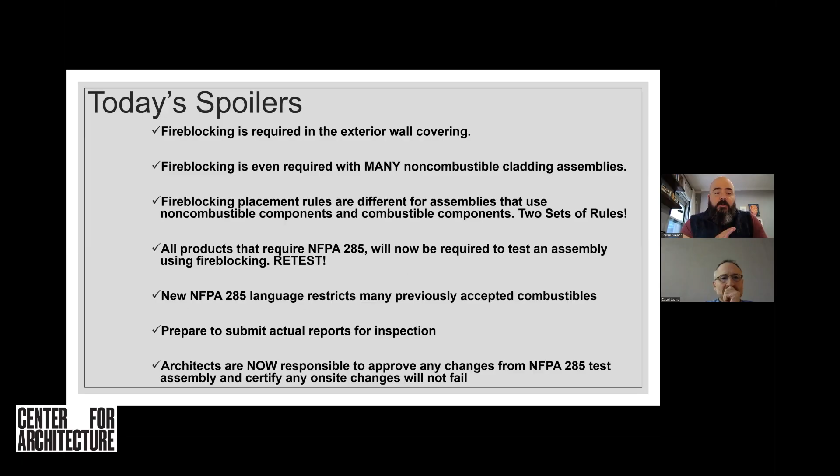To start with, I like to provide these spoilers, mostly so that we can hit on some important points and remember them, but also if you want to fall asleep after this because you're not interested in getting into the details, you have everything you need on this first slide. So let's go through these real quick. Fire blocking is required in the exterior wall covering, and we'll talk about the exterior wall covering in a second. Fire blocking is even required with many non-combustible cladding assemblies, and that's something that's misunderstood. We'll get into the language there.

Fire blocking placement rules are different for assemblies that use non-combustible components versus assemblies that use combustible components. There's two sets of rules, and we'll break those down. All products that require NFPA 285 will now be required to test an assembly using fire blocking, and new NFPA 285 language restricts many of the previously accepted combustibles. We will review that language at the end of the presentation.

And then, manufacturers and architects should prepare to submit actual reports for inspection. And what I think is one of the most major changes from an ideological standpoint is architects are now responsible to approve any changes from the NFPA 285 test assembly and certify that any on-site changes will not fail. Right? That's something at the end of this presentation that might draw a few questions.

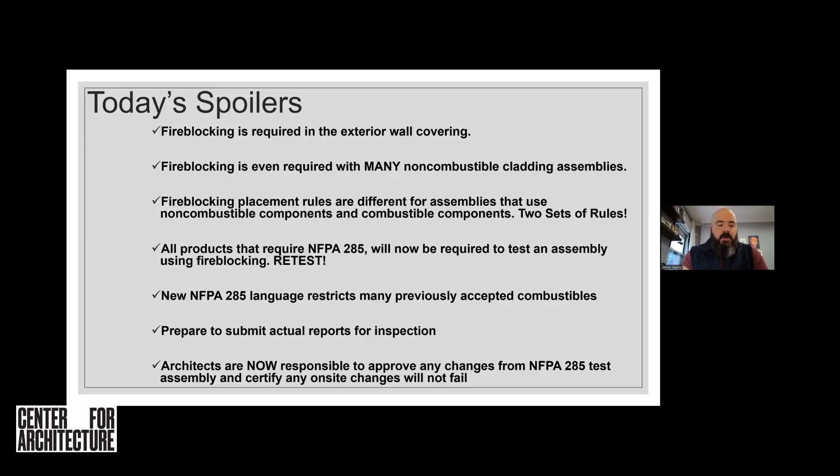So there you go. If you're not interested in the details, you have all the important points. Now let's start with the ground rules that I always like to review before we get into any code language, because for folks that aren't in code language every day, like myself, I think it's often misunderstood how code is actually both written and enforced.

Rule number one for me is that code logic doesn't exist. You have to suspend your typical logic streams and realize that the code language is what it is. Rule number two is that this should be a no judgment zone. I spent the first couple of years dealing with this language, getting frustrated.

And what we should all recognize is that new building codes, especially ones that change this much and try to advance this much, are always going to have conflicts and gaps and areas of confusion. We hopefully will be able to have some clarification and adjustments going forward, but it's something that we have to live with in order for code changes to occur.

And then rule number three, building code language does not equal project compliance. And project compliance is a mixture of both the AHJ enforcement in individual jurisdictions and code language. So even though we're going to be reviewing a lot of code language today, what the code language actually says is also mixed with who's enforcing it and project specific requirements.

And that really gets into our disclaimer here, is that we're going to be talking about certain code language. I'm going to be voicing certain interpretations of that code language, but how it applies to your specific project is going to differ, right? And that's going to be because of a lot of reasons, not just because of your project and the AHJ enforcement. From that perspective, any use of this sort of information on a specific project should be done by a professional.

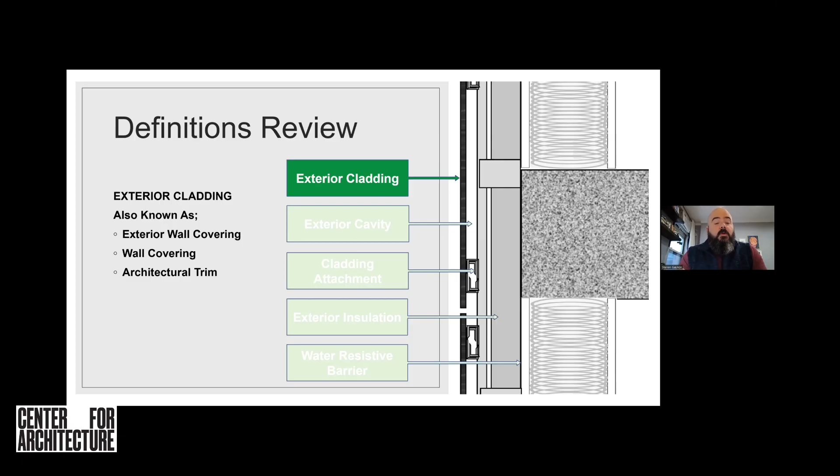So when we're talking about exterior cladding, you see the dark green on your screen here. That's the outermost layer. It's also known as exterior wall covering, or architectural trim in the code language. So remember that. Exterior cavity might be known as the cavity, the airspace, the concealed space, or just the space. When we talk about the exterior cavity, we're talking about the cavity behind the exterior cladding and in front of whatever the next layer is. Maybe that's exterior insulation, what have you.

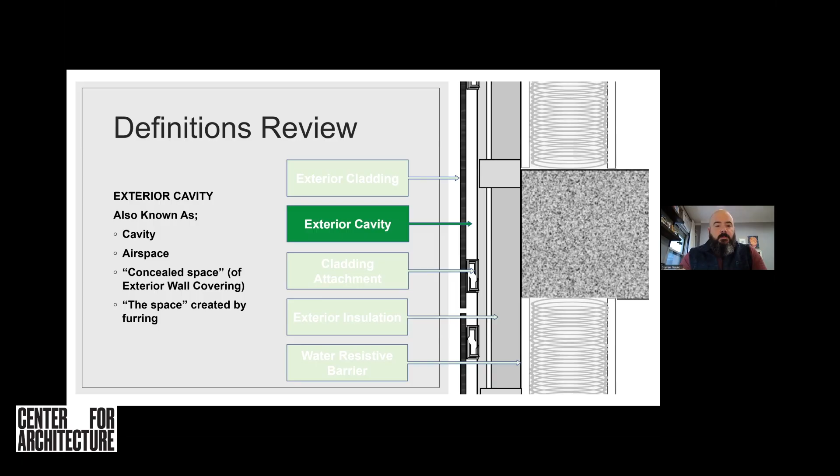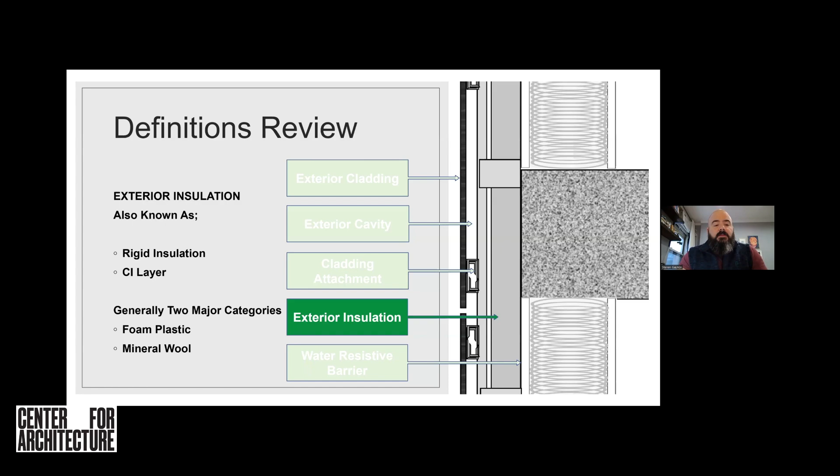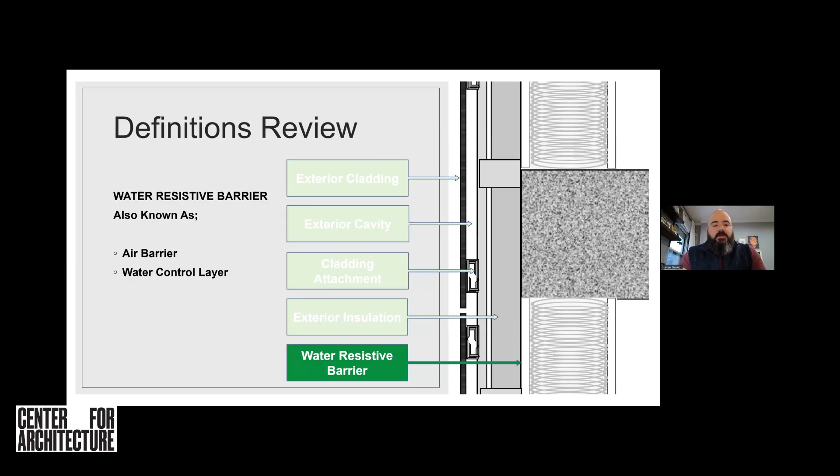Cladding attachment is also known as substructure, attachment system, framing, components, or framing system. And exterior insulation, in the code language, we might see continuous insulation, but we often talk about exterior insulation referring to rigid insulation or the CI layer. And then finally, the water resistive barrier. In the code, that's pretty consistent, but this barrier might also be interchanged with the air barrier or the water control layer. Together, this whole assembly is known as an exterior assembly, a facade system, or exterior wall covering.

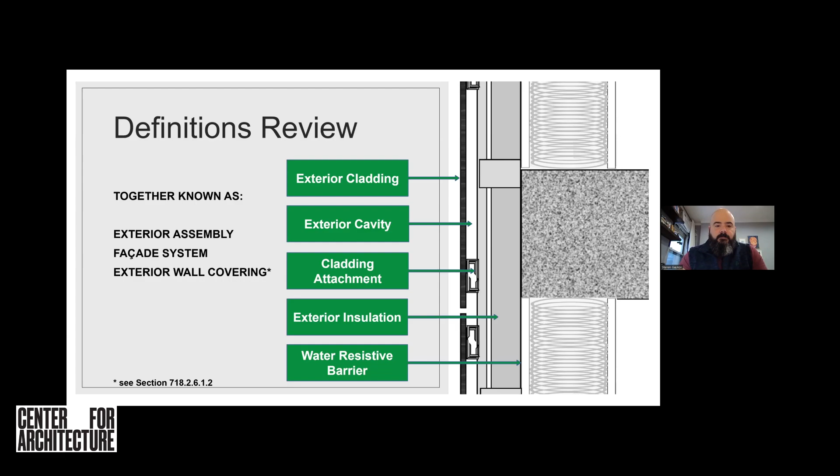And that's another important point. Exterior wall covering in the code might be referring to just the exterior cladding or the entire assembly. Another quick point of review is NFPA 285. If you are not familiar with NFPA 285, then you should probably take a primer course before getting into the language we're going to talk about today. But I just want to talk about a couple of things.

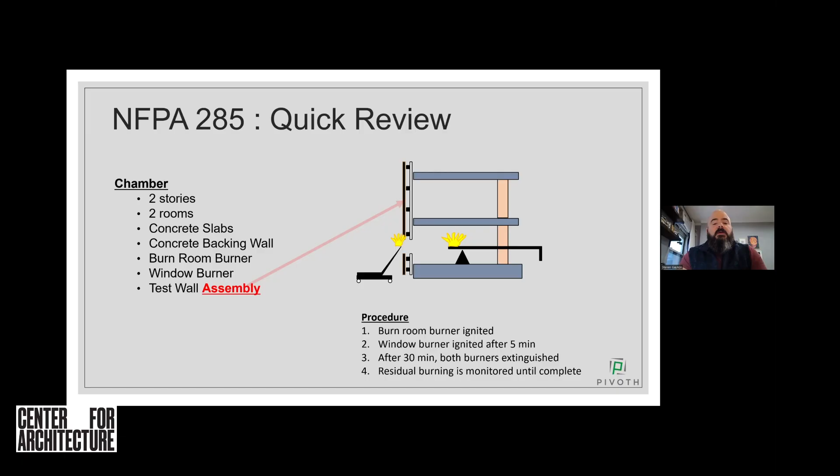On the right-hand side of your screen, you see a section view of the NFPA 285 test. This is a test that determines flame propagation and heat propagation up a wall system. What we want to do by implementing this test is make sure that the exterior wall covering does not propagate flame or heat in a way that spreads it up the building or to separate units.

The test parameters for that are fairly simple, and the important ones, I think, for our discussion are 10 feet above the window opening where the fire is occurring, and 5 feet from either side of that window opening. During the test, you cannot exceed 1,000 degrees in those locations, and the flame can't be attached in those locations, essentially meaning the flame is limited and the heat is limited.

Now, what's important about that is this test traditionally has been used for any sort of combustible materials, right? And that's because the fire doesn't care what it burns. I was taught that very early in my career, and as far as enforcement goes, rule number 3, we've seen that AHJs have usually accepted NFPA 285 tests for materials that aren't mentioned in the code because it's all about the performance, right? That flame spread and the heat development.

And traditionally, this test is for materials that are categorized as combustible per ASTM E136 or that section in the code.

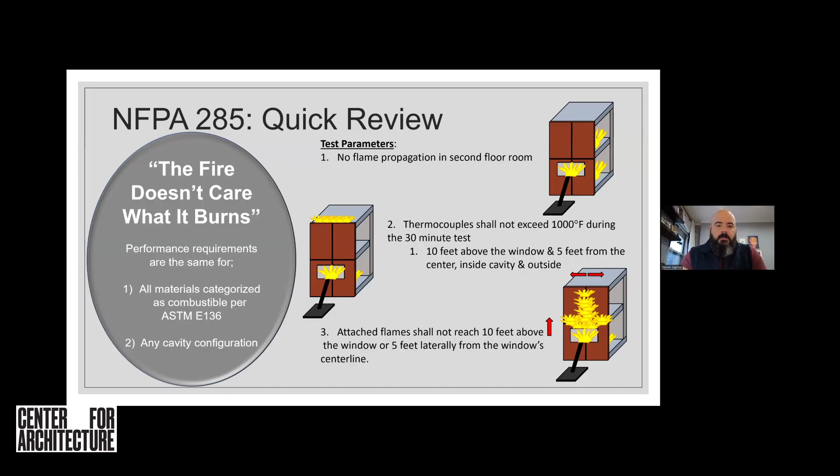Just a quick note, running a test like NFPA 285 takes a bit of time, as you might imagine. Building a 2-story wall, getting everything together, drawings, etc. It takes about 4 to 6 months of planning and then a week on site building and running this test. It could take upwards of $50,000, even to $100,000, depending on what you're testing for each test. So this is not something that's very flexible in terms of just running a test per project or for different changes on a project.

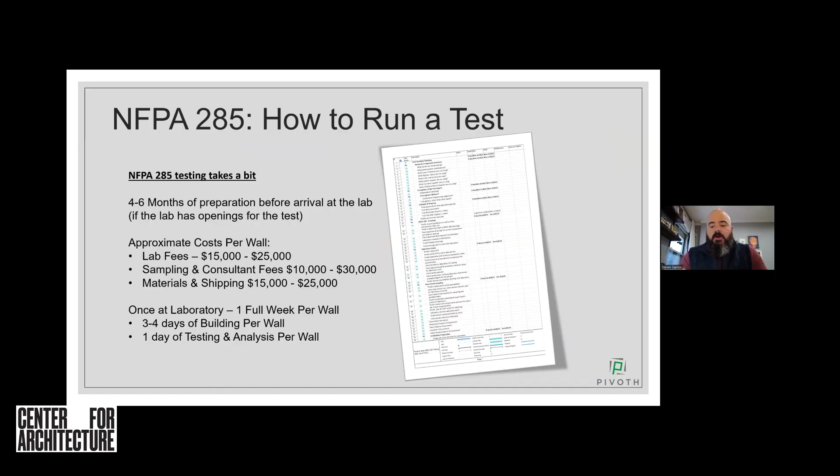Now we get into the codes themselves, and I think the first thing we want to remember is that New York City has a tradition of not necessarily aligning with the rest of the country with building codes. Up until 2008, New York City had their own building code, and then in 2008, New York City decided they wanted to align with the IBC and adopted their modified version of the IBC 2003.

Now, what happens here is that New York City assembles a technical committee. I actually serve on that technical committee now for the next code review, but they assemble a technical committee reviewing whatever IBC language they're looking to adopt, and then modifying that and proposing those modifications to the city council for adoption. So again, in 2008, New York City adopted their version of the IBC 2003.

Now, as we get into the language we're talking about, we're going to be talking about a couple different versions of code, right? So before the 2022 language came into place, New York City had the 2014 New York City construction codes, or New York City building code. That was aligned with the IBC 2009.

And what's important there is as we look at what those changes were for the IBC between 2009 and 2015, we see why New York City may have started to look at these sections and said, hey, we need to take a look at this and decide what's best for us.

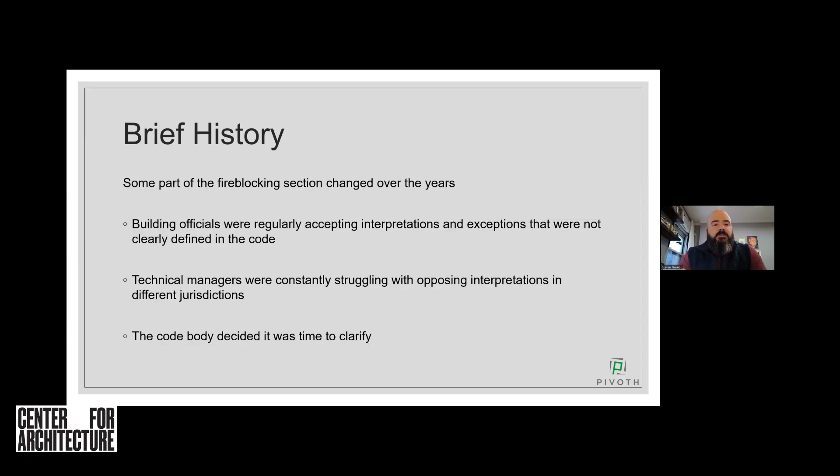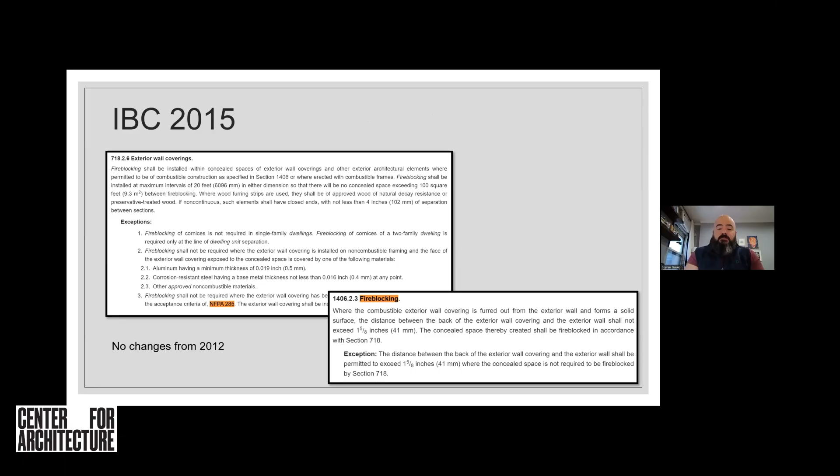That was codified into the code because everyone was using this policy outside of the code before that. Now, 2015 had the same language in it, and then you can see that 2014 matched the 2009 language without that NFPA 285 exception.

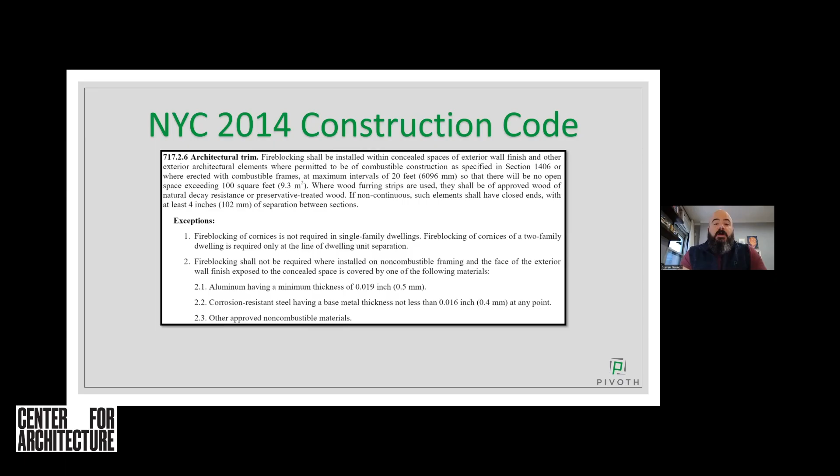The other part that changed significantly is the NFPA 285 sections. In 2009, the sections that required NFPA 285 were really isolated to the MCM section of the code and the foam plastic section. And that's not to say this was the only place where NFPA 285 was used.

Thinking about rule number 3, that language is just as important as enforcement. The way this is enforced around the country, and even in New York City prior to the new code language, we were looking at AHJs saying we can use NFPA 285 for anything combustible, not just MCM and foam plastic. Then IBC codified that into the code.

Now, for New York City, we look at these two sections that were in 2014 that mentioned 285, and then we look at the 285 section that was added for the 2022 code. This both matched some of the language that IBC put in there, but also had significant changes about materiality that we need to talk about in a bit.

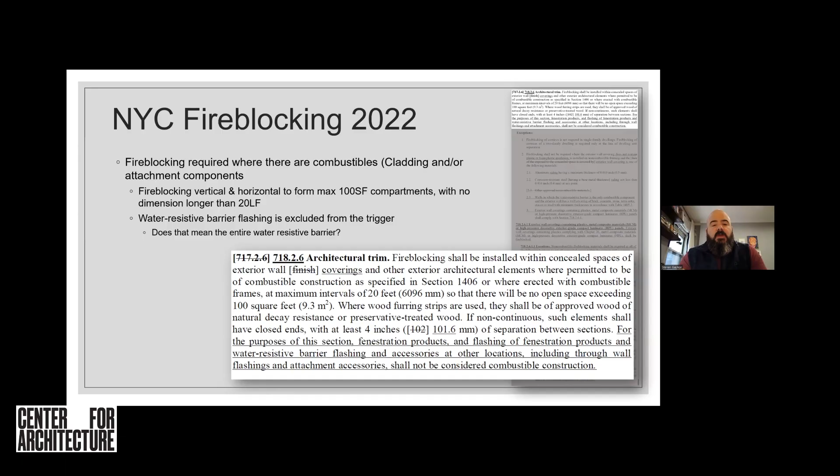Now we look at these exceptions for the New York City fire blocking, or New York City code in 2022. And the first thing we see is they chose not to adopt the NFPA 285 exception in the IBC. So that means having NFPA 285 does not exempt you from these fire blocking requirements.

The second thing is we start to see exceptions where the cladding is called out as having exceptions for not having to use fire blocking, as long as you're using non-combustible framing, non-combustible substructure, and no plastic or foam plastic insulation. So you see aluminum cladding and steel cladding -- these are plate aluminum, plate steel -- as long as you're using non-combustible framing and non-combustible insulation, you do not need to put fire blocking in there.

Very interesting, as we move down to 2.3 here, you see they've crossed out and eliminated 'other approved non-combustible materials.' This was very deliberate. The DOB has made this clear to me, that they wanted to specifically list the materials that had an exception, and they didn't want the combustibility test to be that exception. So that's where we see non-combustible materials sometimes also trigger fire blocking because they are not listed in the exception for non-combustible materials.

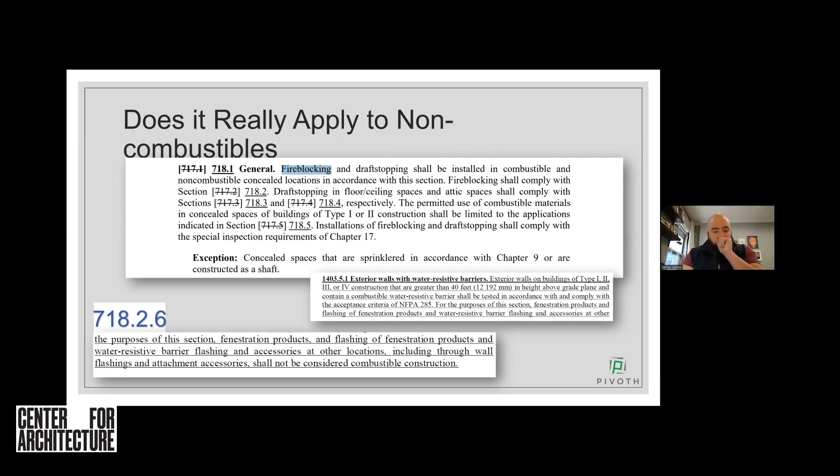I'm not going to get into this language, but it's pretty clear, and the DOB has been pretty clear on that point. What I do want to do is get into the language for the exceptions of non-combustible materials that do not need fire blocking, as long as you're building with non-combustible framing and non-combustible insulation, and the water-resistive barrier is the only combustible component.

So 2.3 was replaced with brick, concrete, stone, terracotta, stucco, or steel cladding with minimum thicknesses according to the table in 1405.2. And I don't know about you, but I can think of a lot of other non-combustible materials not listed in there that now apparently, and this has been confirmed, trigger the fire blocking requirement.

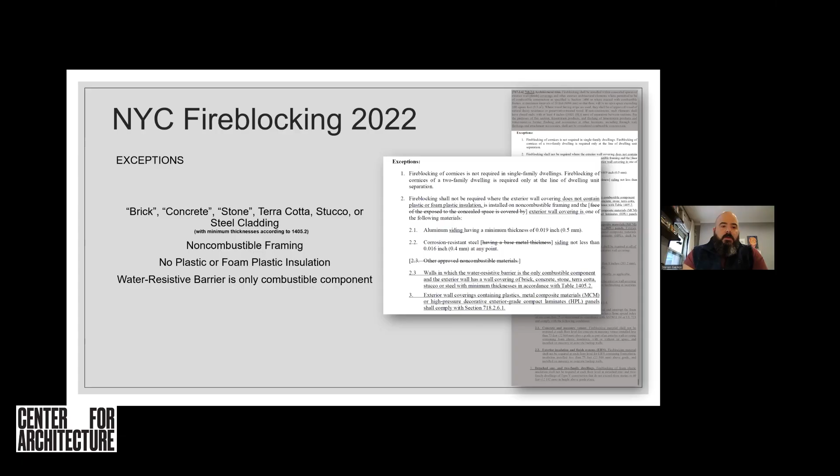Now, even for those non-combustible materials listed, we go to table 1405.2, and we see that you have to use the thicknesses mentioned there in order to avoid the fire blocking requirement. So, thin brick, if you're using any thin brick that's less than 2.6 inches, you then have this fire blocking requirement.

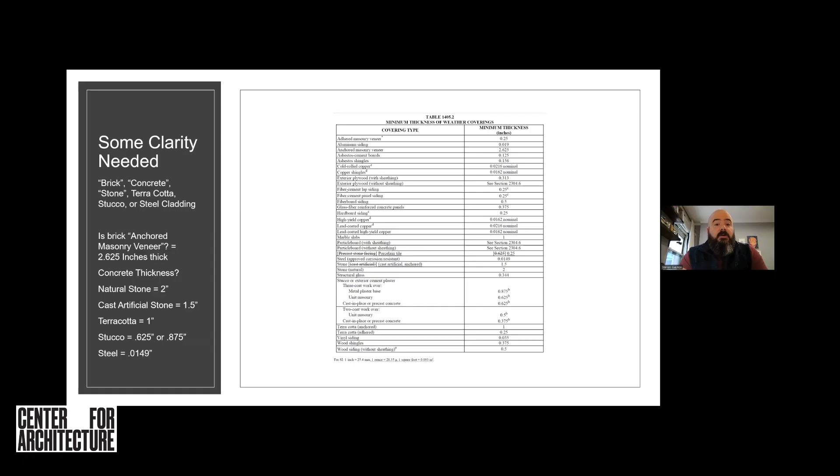Concrete thickness is not listed in this table, even though that's one of the requirements. Natural stone has to be at least 2 inches thick. I was just working on a project where they have 1 1/4 inch limestone, so in my reading of this, that means the fire blocking requirement's triggered. And you see the other ones here - terracotta needs to be at least 1 inch thick. If you're using a flat terracotta that's 1/2 inch thick, that does not have the exception.

Then you look at other non-combustibles. You look at porcelains - porcelains are made at above the temperature for the non-combustibility test, and they are still not part of the exception. And that's where we start to look at rule number 1 again.

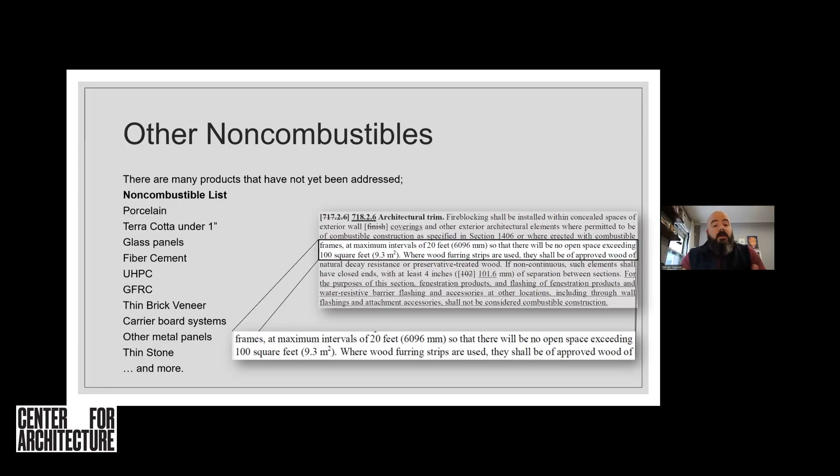We say suspend your typical logic streams. We don't have typical logic streams in the building code. We have to work with the language. So you look at porcelain, you look at terracotta under 1 inch, you look at non-combustible fiber cements, UHPC material, GFRC material, and others, all still triggering the fire blocking per this language.

Moving on, so that's an important point - keep that in your brain, that those non-combustible materials still trigger fire blocking. And that's where you get the first rule of fire blocking, those 100 square foot compartments that are listed in the main section up there.

Now we move on to exception number 3 in the 2022 New York City Building Code. And this exception essentially says if you're using combustible materials like HPL, MCM, and plastics, then we have a different set of rules. So it says this is an exception - you do not pay attention to the rules in 718.2.6, you pay attention to the rules in 718.2.6.1.

And what that means is if you have these materials, you have to have fire blocking around wall openings, around every slab edge for a minimum of 8 inches of height, and where the occupancy changes. For those of you who are paying attention, you see that a minimum of 8 inches height is the first time we've seen any requirement in terms of the thickness of fire blocking.

There are requirements for the types of materials that qualify, but not the thickness, and so this is the first time we see 8 inches. We don't know what that is for the other fire blocking requirements. The DOB has not been clear about that. The language is not clear about that. That's something that has to be worked through.

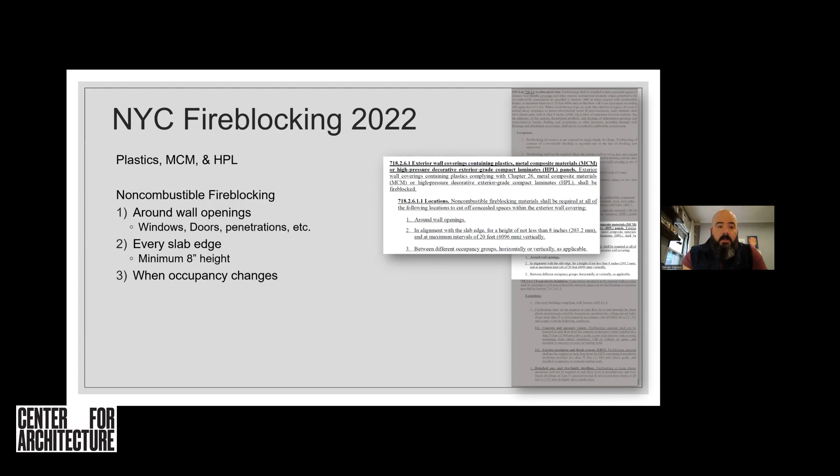Now, as we look at foam plastic insulation, we have essentially the same rules for foam plastic around all wall openings, at the slab for 8 inches, and when the occupancy changes. What's important to note here is that it's very clear that foam plastic needs to be interrupted with non-combustible materials in order for the fire blocking rules to comply. So you need to stop and start your foam plastic.

Now, there are other exceptions where you don't need fire blocking for foam plastic up to 75 feet if you have very specific conditions. If you have concrete or masonry completely encapsulating that foam plastic up to 75 feet, and you're on a concrete backup wall - so no studs, etc. - then you don't need to put fire blocking for that application. The same thing for exterior insulation finish system on a fully concrete backup wall, where the insulation is fully encapsulated.

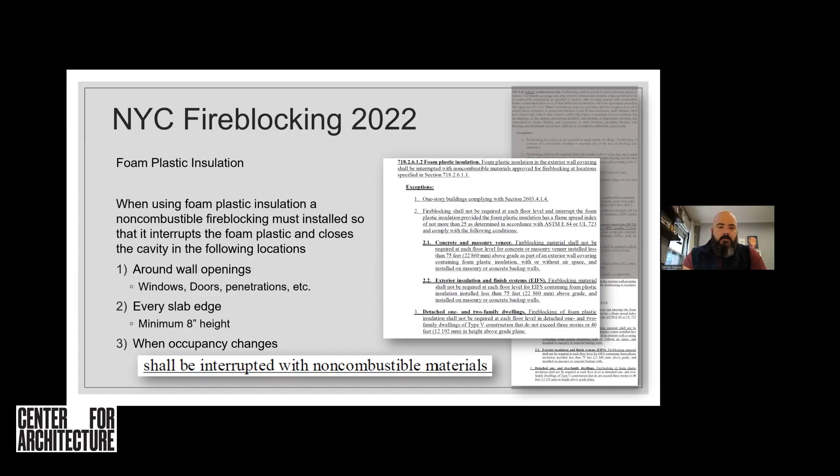Not going to get into the one-story exception. New York City is unique in that it has both a commercial and residential code sort of combined into one.

And then, I do want to get into the NFPA 285 language for just a bit. The NFPA 285 language states, rather than what the IBC did in this time period going from 2009 to 2015, the IBC said, okay, we've been using NFPA 285 for all combustible materials because we only care how the wall performs, and 285 helps us determine how the wall performs. So we're going to expand that basically and say, we can use NFPA 285 for all combustible materials.

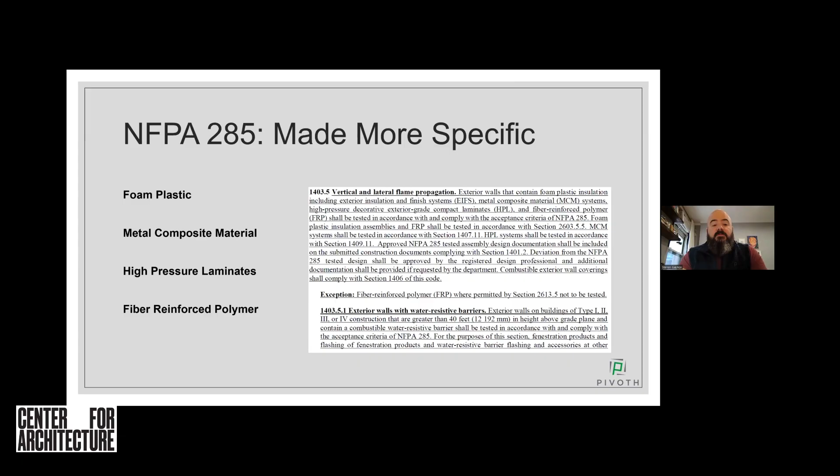The New York City Building Code has gone the other direction and said, we're going to take this NFPA 285 language and we're going to say specific materials shall be tested to NFPA 285, and that's foam plastic, metal composite materials, high pressure laminates, and fiber reinforced polymer. And then the rest of the materials are sort of left out in no man's land.

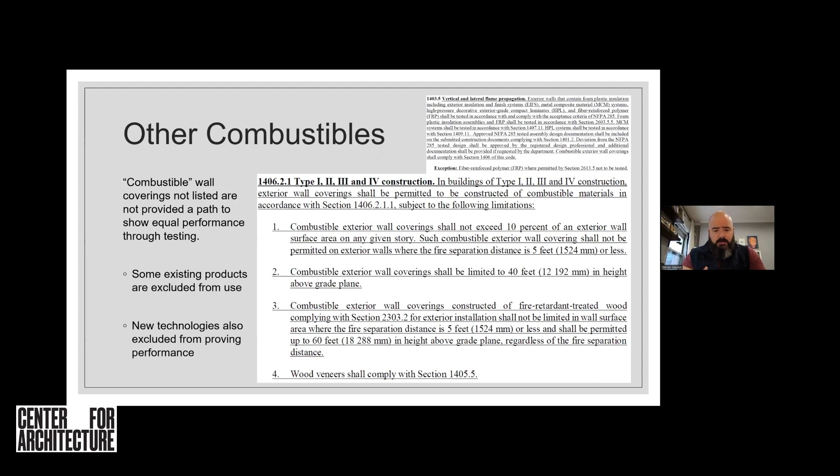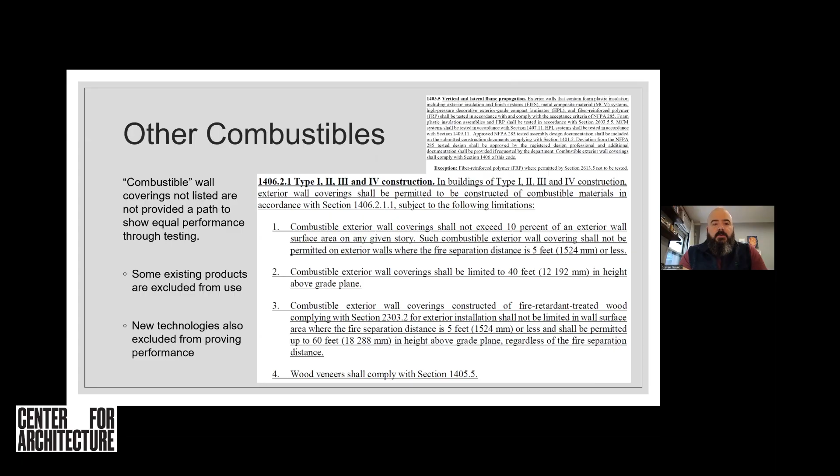So there's other combustibles that are not mentioned in here, right? And you can think of a ton of other combustibles. What happens with those other combustibles? Essentially we're relegated to the section that limits combustibles to about 10% of the exterior wall area, and has other limitations in terms of height and separation distance that I'm not going to get into here today because I want to talk about fire blocking. But you should know that that's one of the open questions of the new code.

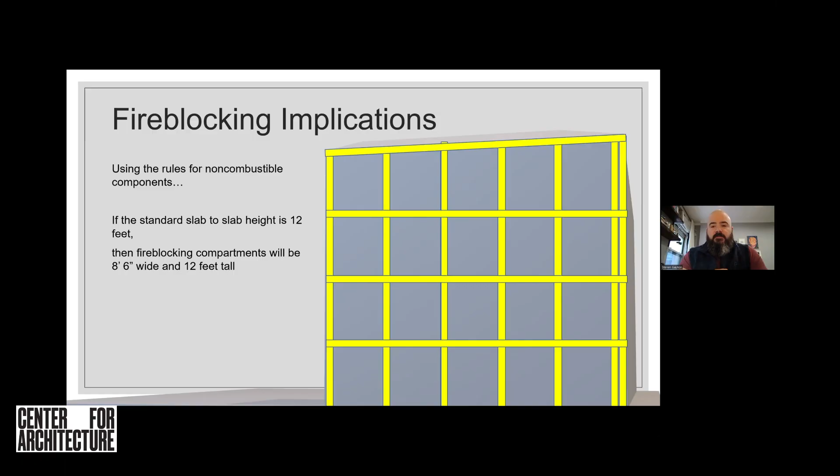Now let's get back into fire blocking and look at what these implications are. Now, I know there's a lot of architects on this call, so forgive me for my rudimentary PowerPoint sketch here. But what I wanted to do is give an example of, if I'm looking at a 4-story building, I didn't put any openings in there, but I'm using the non-combustible component requirements, saying, okay, I have to make 100 square foot compartments. I'm going to assume my slabs are about 12 feet apart, which means that my verticals then have to be 8.5 in order to meet that 100 square foot. So here's my fire blocking layout on this wall in yellow.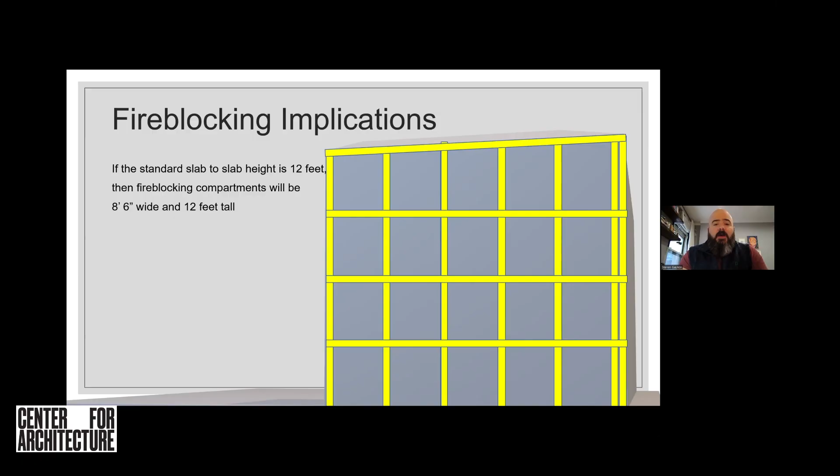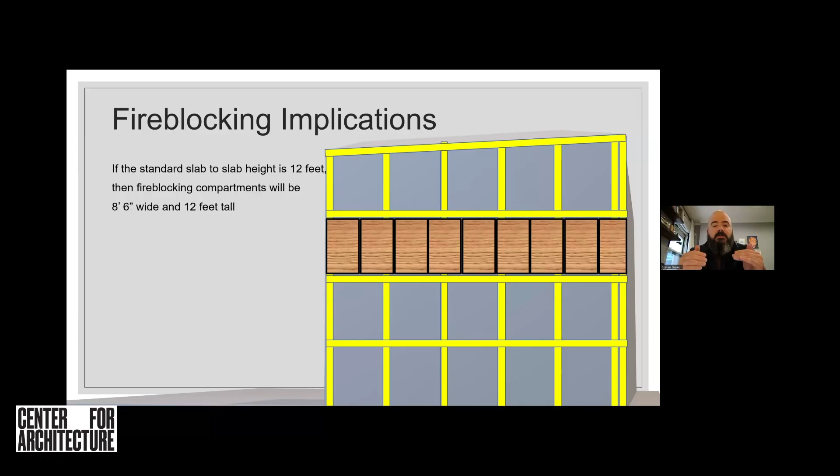Now, what does that mean? When I want to put up a Rainscreen system, I have to think about drainage and ventilation, right? And that exterior cavity has a whole lot to do with the drainage and ventilation for my Rainscreen system. So I want to maintain my Rainscreen wherever I can. So I'm going to put up a row of panels between my fire blocking, right? And that's the way I'm going to maintain my Rainscreen system, is have an opening above and below that fire blocking so that I can still maintain some amount of drainage ventilation. And so I'm going to put my panels up like that.

And then I want to limit the fire blocking where the fire blocking is going to really affect my drainage ventilation, the performance of my wall. And so I'm going to put all these little panels directly over whatever the height of my fire blocking is. And there's my wall assembly. Now, what does this look like when we're talking about water management, airflow, thermal performance? Well, let's look at this detail.

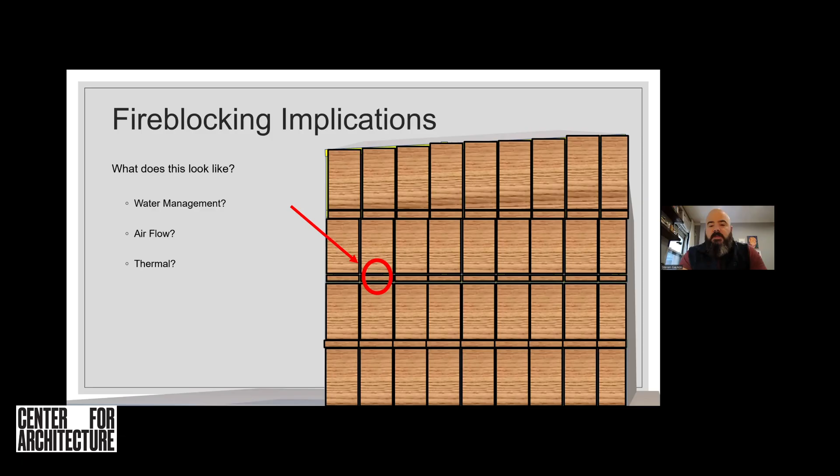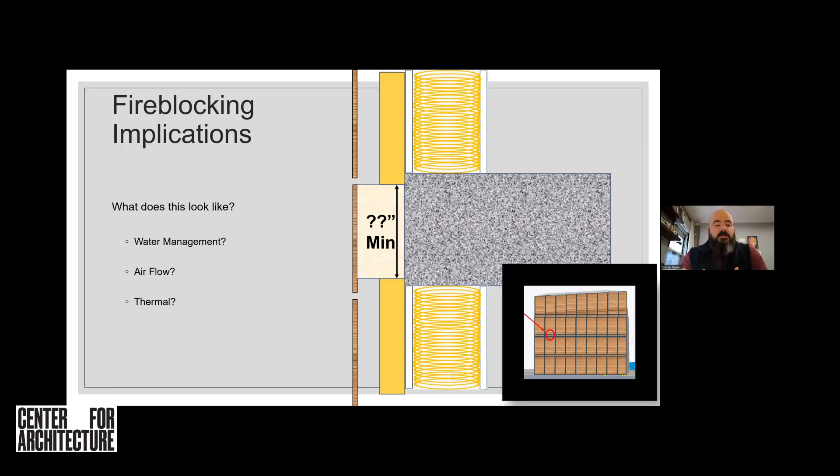Again, on the right-hand side of your screen, you're seeing a section detail of what that wall system might look like. You see that slab, you see the stud wall above and below that. You see exterior insulation. I've eliminated all the components in here just to make it a little bit easier, and then shown the cladding with the cavity. The first thing you see is that exterior fire blocking. Again, if we're using the non-combustible rules, we don't know what that fire blocking at the slab needs to be in terms of height. If it's combustible, then you have 8 inches. For non-combustible, we don't know what that is, but it's some amount. And so let's look at what the performance of that wall is.

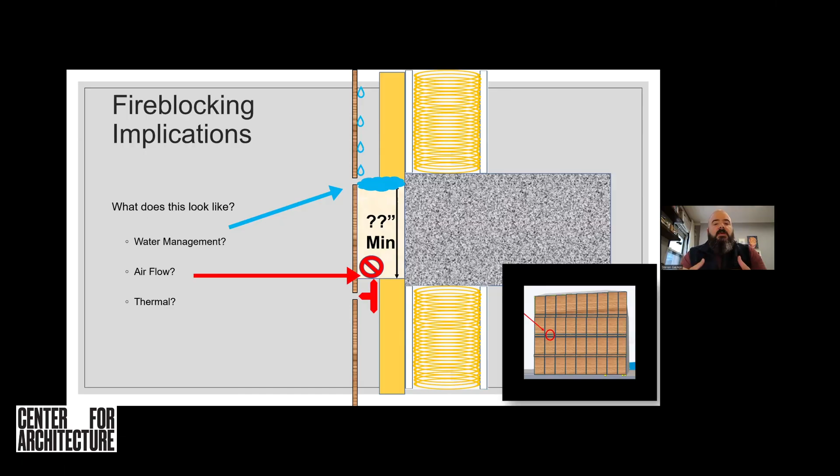Well, if we're using mineral wool, and I'll tell you why in a moment, mineral wool at this point is the only reasonable material that we can assume there. If we're using mineral wool, we might get some drainage through that mineral wool, but over time we're going to have dirt and silt and leaves and other things in that cavity that plug it up, and we're not going to have any sort of control over the water management at that area. So, looking at mineral wool from the airflow angle, we are definitely going to be blocking the airflow through the cavity, and so inherently these fire blocking requirements conflict with our typical water and air management designs that we use on buildings.

So what do we do? The first thing I would think is we put metal flashing in there, but you can't put metal flashing over the face of your insulation and feel good about it. So we're going to get water behind there, and then you're going to get someplace that never dries out, and who knows what happens with that water. So then you're looking at through wall flashing, but then you run into your thermal performance. What happens when you put continuous thermal bridges every place you have a horizontal fire blocking, right? And so this isn't only at the slabs, it's around openings, it's everywhere we're going to need fire blocking.

That's, what is the degradation of your insulation if you're doing that around your building? So, the next question is membrane flashing. Well, we are attaching over a number of different materials that are moving in a number of different ways and may or may not be able to stick to membrane flashing. I think that that's just not an application that membrane flashing is made for. And so I think we have to stick with that idea that we would have to flash with a rigid flashing.

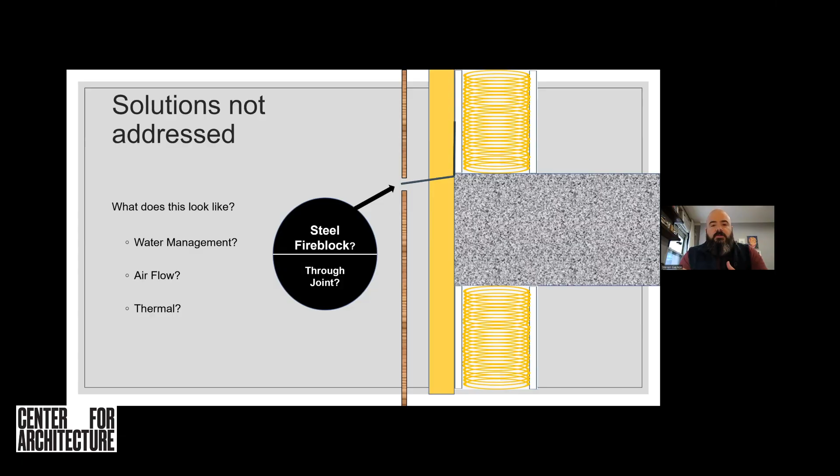Now you might say metal is non-combustible, so why don't we just make steel fire blocking all across the building? The fire is not going to go through steel. We can then put a bigger joint above and below that steel, and we maintain our airspace and drainage, etc. Now, that's a good thought. Steel is not one of the approved fire blocking materials, and there's good reason for that. Depending on your assembly, steel is not going to prevent the heat from transferring, and if you have combustible materials adjacent to that steel, you may also have a dangerous situation with fire on one side of that.

So then we get into other solutions, and I will tell you right now, we don't have a good solution for maintaining airflow and drainage that is approved by either New York City or any other AHJ right now in the U.S. We do have good solutions outside of the U.S. that are approved, tested, and have performed over time, like intumescents. Now, full disclosure, I have a client that I'm helping through the New York City approval process with an intumescent fire blocking, and hopefully that will give us some path forward in terms of being able to maintain both drainage and ventilation and meet your fire blocking requirements.

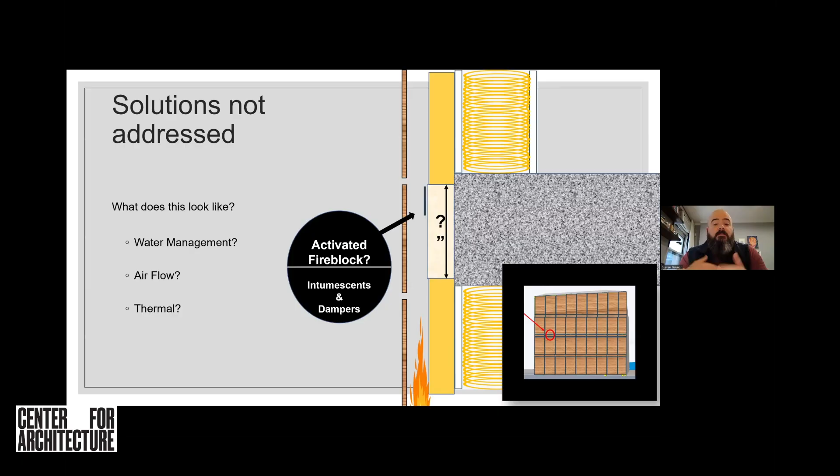For those of you who don't know what intumescents do, essentially they expand when they're exposed to heat. So you can put a small strip of intumescent into a cavity and then maintain airflow and drainage. Now, when you have a fire event and that heat hits the intumescent, it expands, effectively blocks the entire cavity, and creates the compartmentalization we want during that fire event.

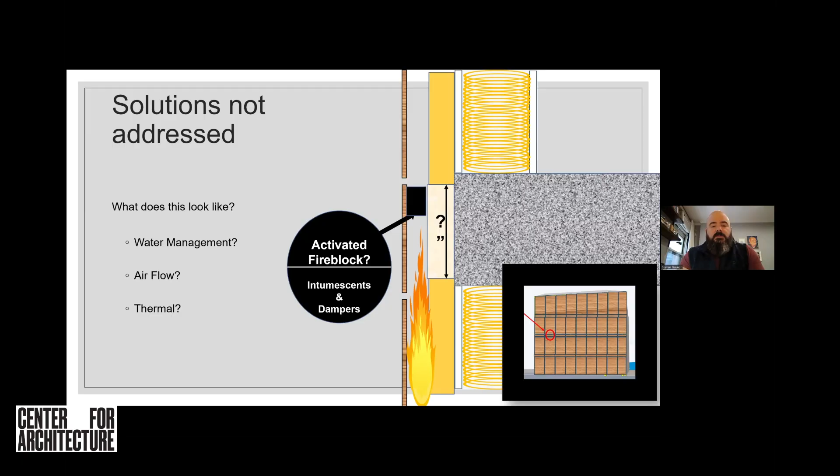Now, this has been tested over and over again. The first test I specifically did with intumescent was back in 2008 when I was dealing with fire compliance issues, and I found that it effectively satisfied the requirements that we had back then. But again, in the U.S., we don't have a lot of AHJs that are looking at these sort of solutions.

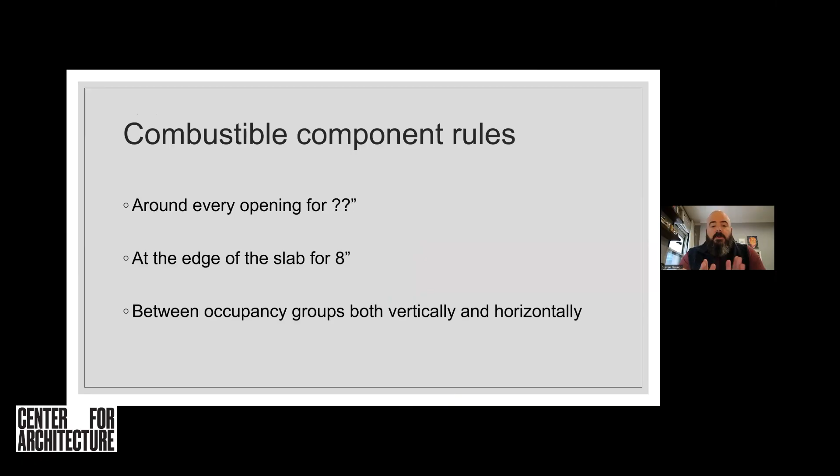Now, for the combustible component rules, I just want to hit on it again that we don't know what those fire blocking depths or heights are, other than at the edge of the slab. But what I want to do is take a look at what it looks like from a combustible component standpoint. So I live in New York City, which means I effectively live in one room for my entire life, and this is essentially the outside of my apartment in my building, which is 12 stories.

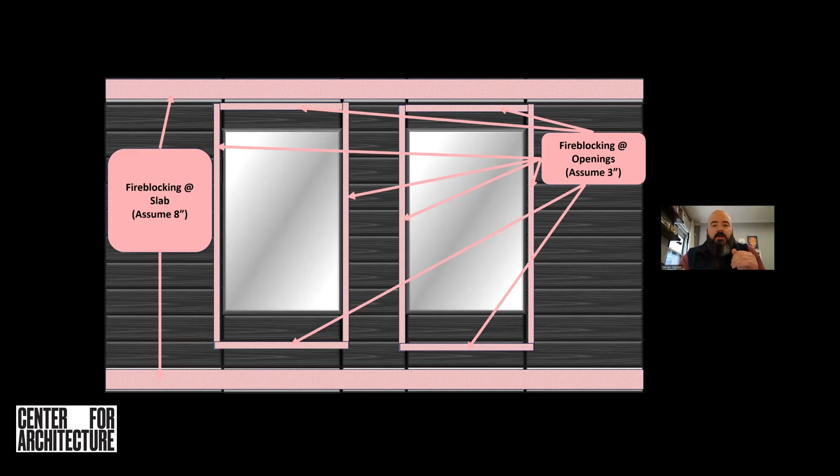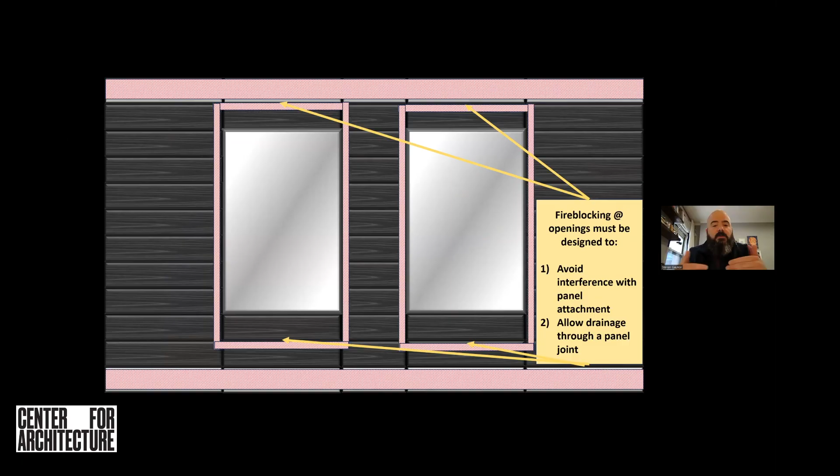You see the two windows there. I've put maybe an MCM or some sort of combustible material, HPL, something like that on the outside. Then we have to go with the fire blocking requirements for MCM or HPL, which means that we're going to have to go around the windows and at the slab, right? So what does that mean around the windows? Well, essentially, it means that we have to create a compartment around that window and also avoid all of the other components in there, meaning that you probably can't put it directly around the window. You're probably going to have to work your way around attachment components, etc.

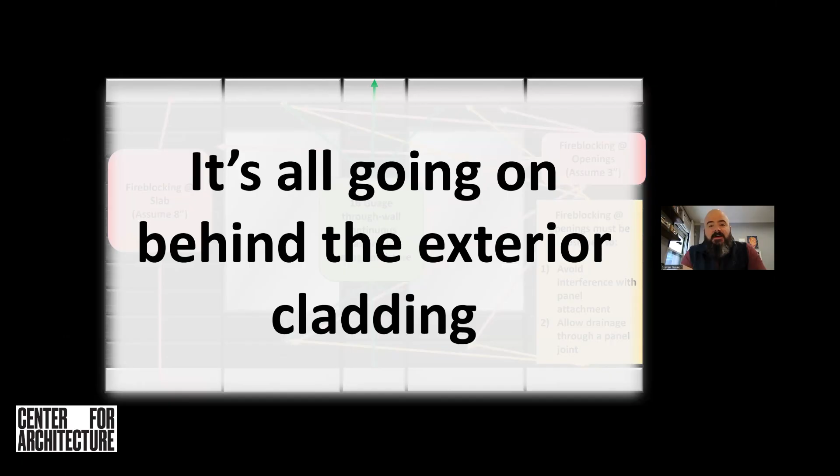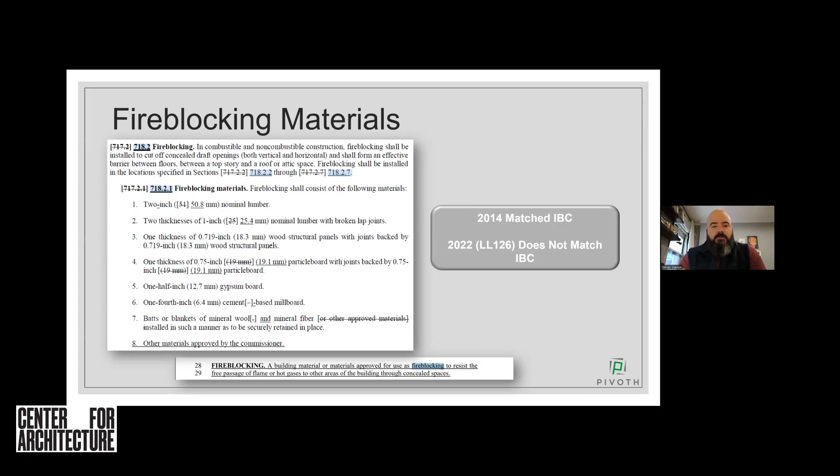Just hitting on this real quick, if you're doing the NFPA 285 test, you are going to need to have fire blocking in that test. Judgments will not be accepted that say we have an NFPA 285 test, and if you add fire blocking, it'll perform the same. Those judgments will not be accepted in New York City, so you have to retest if you do not have fire blocking in your NFPA 285.

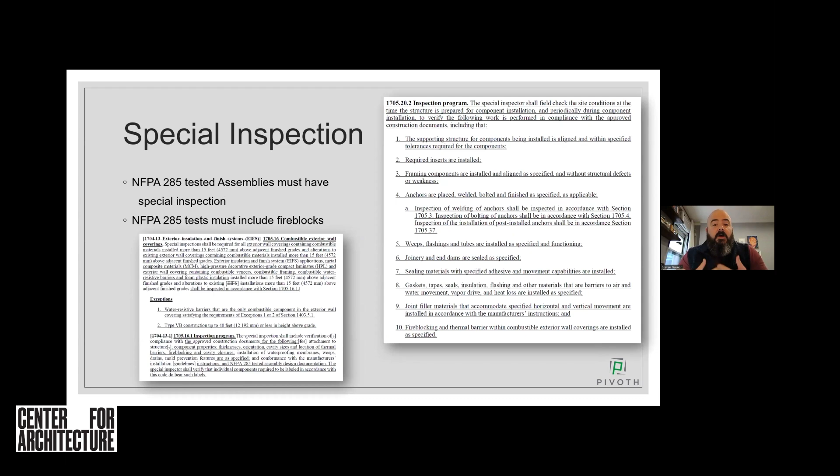Also, special inspection will now include your NFPA 285 assemblies and your reports to make sure that the details that are on the wall system are matching your 285 assembly. And that does include the fire blocking details.

And then, I said I was going to get to it. This is really where the architect and registered design professional get into more liability than they had in 2014. Essentially, what this says is that the registered design professional shall approve the NFPA 285 tested design.

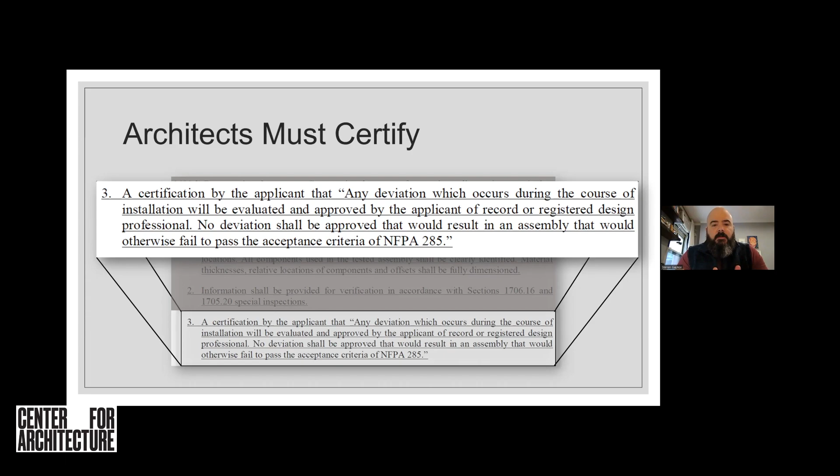But then it goes further, and if you look at number 3 here, it says a certification by the applicant that any deviation which occurs during the course of installation will be evaluated and approved by the applicant of record or registered design professional. No deviation shall be approved that would result in an assembly that would otherwise fail to pass the acceptance criteria of NFPA 285. Now, to me, that's a pretty high bar. I don't know if I could sign something like that, but this is what's required in the code.

Now, getting away from the code here, key takeaways are that achieving high performance building enclosures has become a little more difficult. Designers and engineers have to work harder to find innovative ways to meet competing goals. Environmental goals like Local Law 97 become more difficult to achieve while trying to meet other compliance requirements.

And then increased interruptions in the wall covering assembly and more paths for air leakage and water leakage have to occur from us having to add these different methods for not only fire blocking but also protecting our walls.

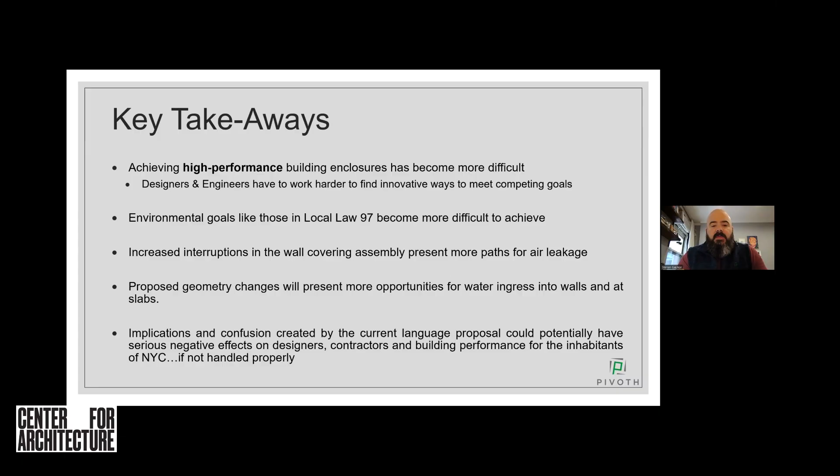And I feel strongly that implications and confusion created by the language could potentially have negative effects on the whole community. And that's coming from a place where luckily I was able to work for manufacturers that did it right, but I come from the manufacturing side of the business, and I know all the tricks of the trade and things that happen either intentionally or unintentionally with these things. So those sort of gray areas are definitely concerning to me.

Now, green shoots, this is where I think we could talk about some positives. The DOB is aware that items need to be addressed. An approval process does exist now. I spent the last 2 years of my life trying to sort of get my way through that. And then a new code review committee is assembled. And, just in terms of knowing that things need to be addressed, the DOB has already put out one bulletin. I've heard rumblings that there's a second bulletin in the works for clarification on these items.

For those of you who are familiar with building code language, you'll know that the bulletin really doesn't go beyond the language, but it does clarify in a little more plain language what the DOB intends. And then there is a review process that my company has sent three products through, and those are non-combustible products that need this review, right?

So I'm proud to say that three clients of mine, Porcelanosa, Swiss Pearl, and Equitone, have sent their non-combustible panel systems through this and have achieved an acceptance for being able to be used like those materials in exception 2.3, right? So as long as they're being put up with no other combustible materials except for the water-resistant barrier, they do not need fire blocking.

The DOB has been very clear that not only do these materials need to be reviewed, but individual products from individual manufacturers need to be reviewed. In all of these letters, it says it does not apply to other materials in the same segment, it only applies to the individual products.

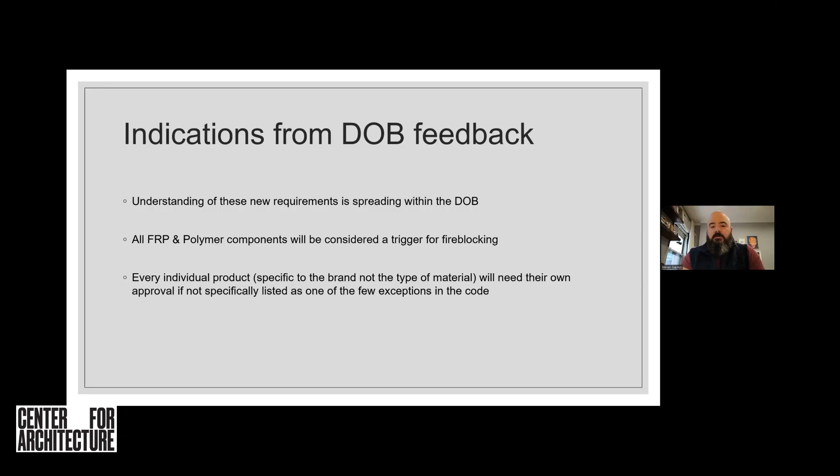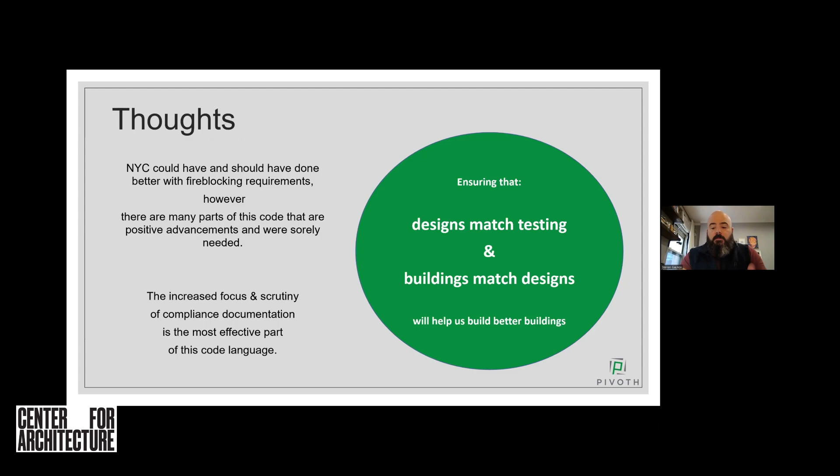Now, my thoughts are, New York City could have and probably should have done better with the fire blocking requirements. However, there are many parts of this code that are positive advancement, and I think the increased focus on transparency of compliance documentation and making sure that things are built that way is the most effective way to have safe buildings. If we were doing that across the rest of the country, I think there'd be less concern about where this fire performance stands. And for me, ensuring that designs match testing and buildings match designs will help us all build better. Thank you. I hope this was useful.

David, do you want to pull up the questions? Hi, Stephen. Yeah, I am looking at our Q&A and I don't see any. Everyone's asleep. You did such an excellent job of presenting that there weren't any. So I'll see if they feed in. As they feed in, I guess I can ask you a few. First of all, thank you very much, Stephen, for that excellent presentation.

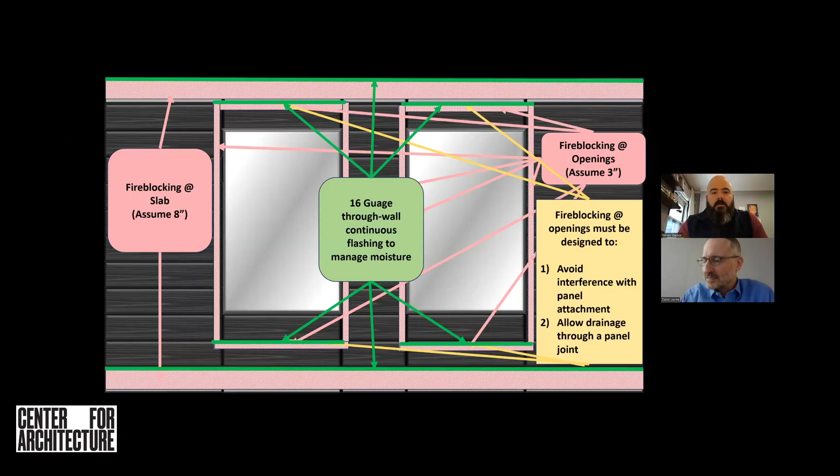Just getting back to the original diagram that you did, if you have non-combustible construction, you will still have that 100 square foot rule, so to speak. You're saying that we will have to fire block at slab edges, we know that, and at slab edges we're going to be at 8 inches. But we also have to form areas no greater than 100 square feet. Is that correct?

So yeah, if you're using non-combustible cladding, insulation, and framing, the WRB is still a trigger for the fire blocking. Depending on the performance of the WRB, it may not be a trigger for NFPA 285, but it's still a trigger for fire blocking. And in that case, where you're using non-combustible insulation, framing, and cladding, you have that 100 square foot compartment. And so it doesn't need to be at the slab, but this drawing just makes it simple in terms of translating that design to your panels. Okay, thank you. All right, we do have a few more questions coming in that I'll share.

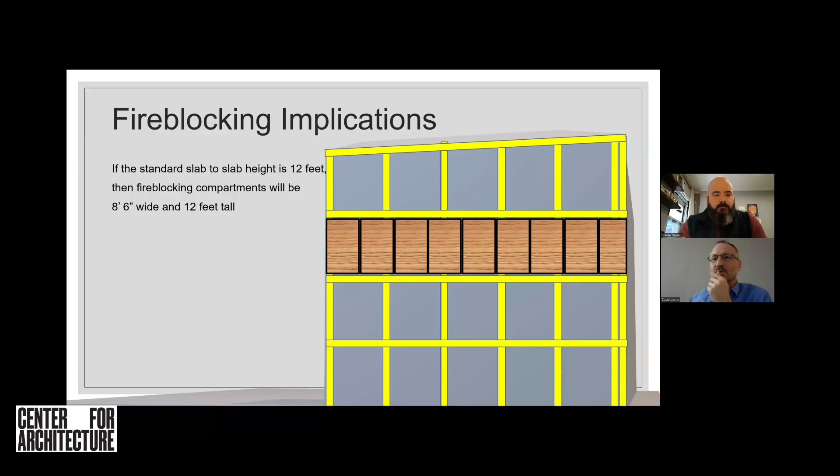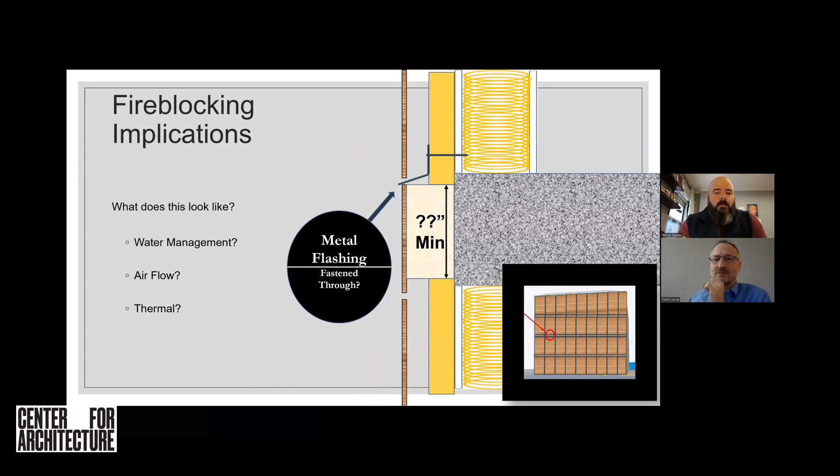Someone asked, is this code retroactive? I'm assuming for projects filed under the previous code. I'm assuming the answer is no. The answer is no. The code is not retroactive. The code was voted in on November 7th, 2021, and came into effect on November 7th of 2022. So anything that was permitted after 2022, this definitely applies to.

I don't fully understand the process of sort of the back and forth of the permitting process. So there might be some gray area of things that were submitted over that span.

Okay. We have another question that asks, what would you say is the general timeline for product getting approval, similar to what your company did for Porcelanosa or Equitone or Swiss Pearl? So my experience is that because you have the DOB process, and that takes a bit of documentation assembly and a bit of back and forth, and then you have the FDNY process, which is the same thing. My experience has been about 8 months from the application being submitted to getting that letter.

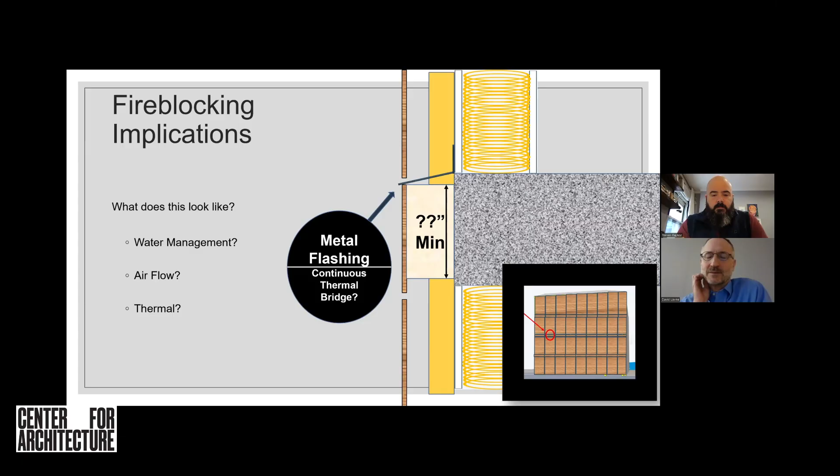Another question asks, given that smoke and fire typically spread from windows, do we need to fire block at window openings and slab edges too? And I think you clarified the answer is yes for that. So when you're using combustible components, fire block is required, and you have to remember that if you're familiar with fire blocking on other parts of the building where you actually have rated wall assemblies and you have enclosed spaces that are rated on either side, or joints between floors and things like that, that is a different scenario than with cladding that is likely not rated and will burn away during that time period.

And I say that to say that this is a different mindset in terms of what we're trying to do, and what we're really trying to do is slow down the progression of fire when you put fire blocking in there. On the exterior of the building, smoke is unfortunately not something that we can really control.

Okay. Another question came in, are porcelain panels considered combustible? And I guess that goes back to the table, or? Right. So they're not considered combustible, but they are considered to be a trigger for fire blocking, right? And so you might have porcelain panels. A lot of the porcelain manufacturers will put an adhesive mesh on the back of the porcelain for safety reasons, right? So as almost an insurance policy.